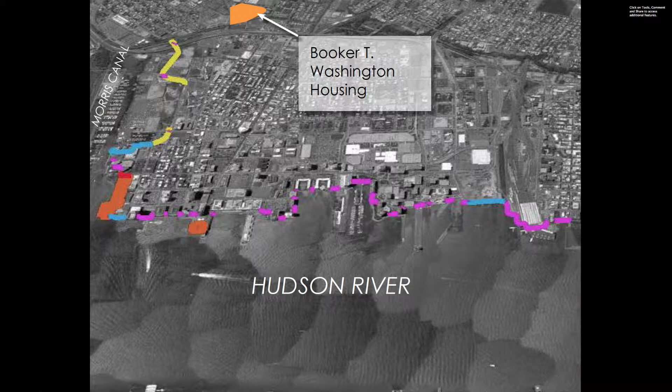Washington housing site. What that meant is that during Superstorm Sandy, parts of the site experienced 5 to 6 feet of floodwaters. Basically, there were rescue boats going around the streets of Booker T. Washington during that event. The dots are actually part of a year-long study we did with Stevens Institute of Technology, looking at water flows in the area and doing a resiliency plan. Next.

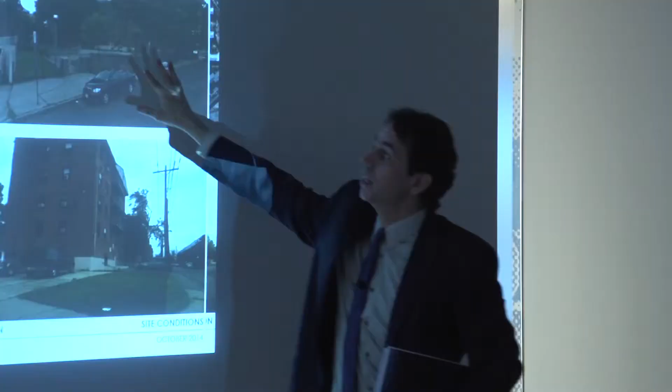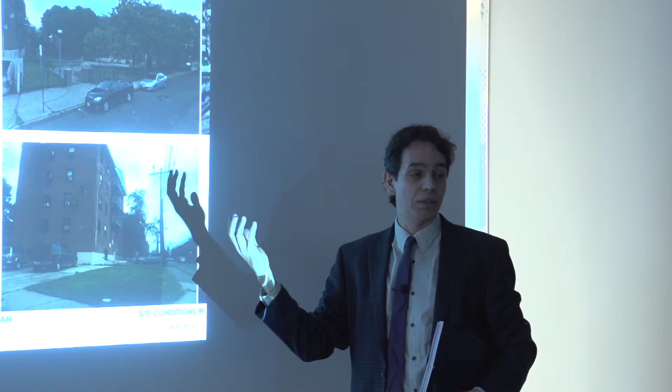But you can see this is lower scale campus style housing. There are actually wonderful mature trees on the site. We did a great walking tour with the residents who really told us a lot of anecdotes that reinforced our digital analysis of the site. Putting those two things together was absolutely critical. The residents were fabulous. Next.

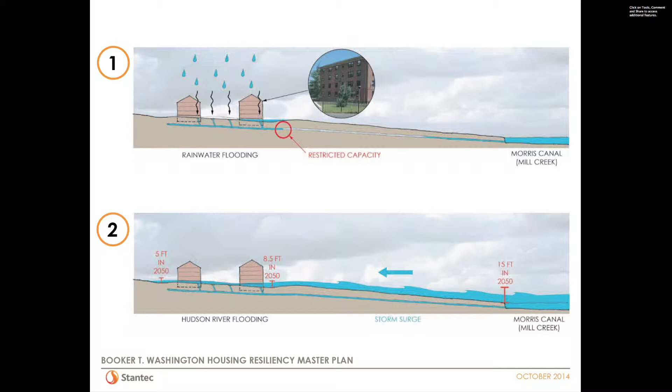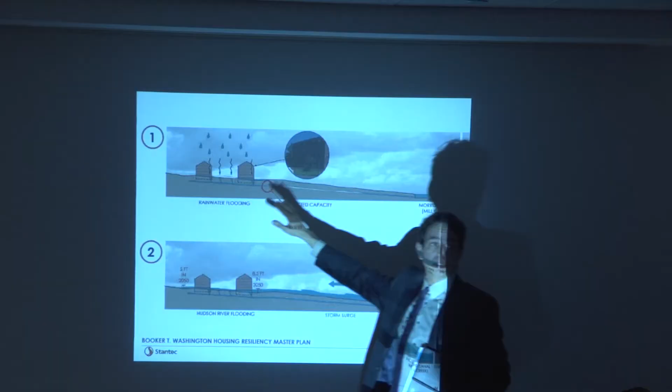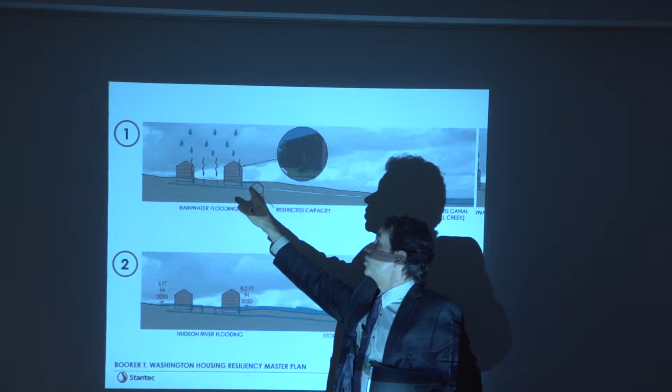And what we learned is that there's really two types of flood events on this site. So if you're looking at a side view of the public housing site, the first event that you get is a heavy rain event. All of the rain that lands on this property basically is collected into a series of pipes. The well-known combined sewer system doesn't have sufficient capacity for these major heavy rain events. So you get localized flooding on the site, and then so much pressure that the water is actually backing up into the first floor plumbing. So we have that as one set of issues.

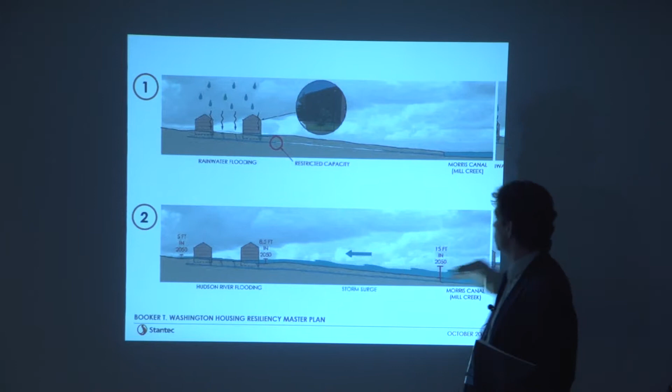The second set of issues is flooding that comes from the side, when the Morris Canal and the Hudson River overflow their banks, as in Sandy, and you get a rush of water coming in from the side. What we did was analysis of future sea level rise. While we had maybe 5 to 6 feet of flooding on the lowest end of the site during Sandy, we anticipate that's going to increase to about 8.5 feet of floodwaters on the lowest end and maybe 5 feet on the higher end.

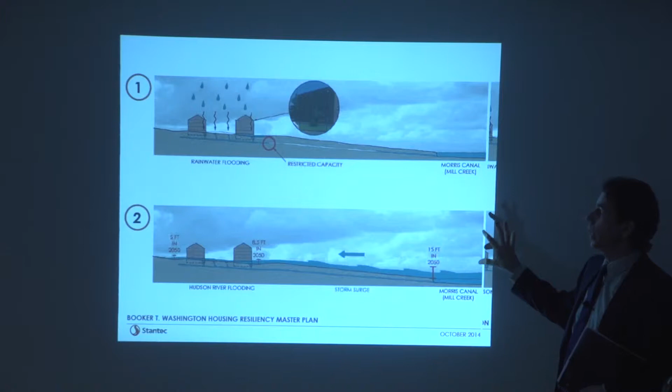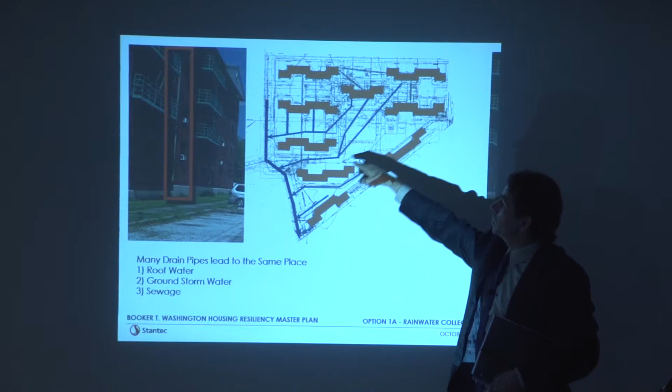So I want to really go through strategies to deal with those two types of flooding events separately. So go to the next. So let's deal with the heavy rain events first. Next. Here you can see a plan of the project and a map of the underground piping connections. The buildings are in orange. These blue lines are basically all of the stormwater and sewer connections.

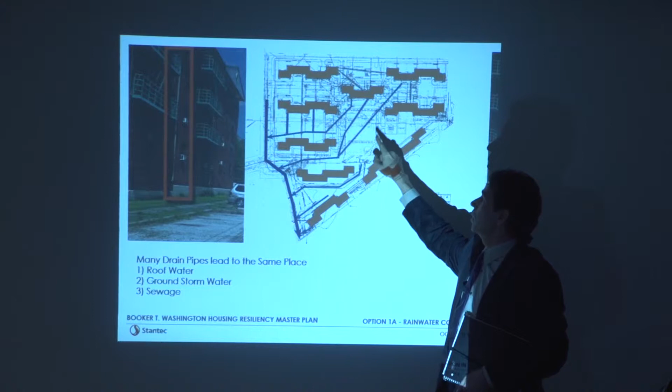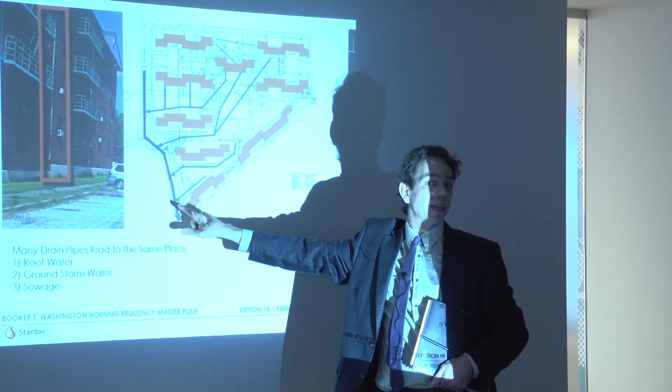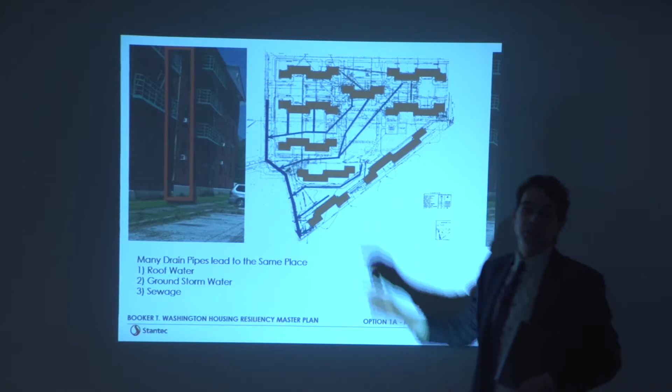All of the roofs, all of the groundwater, including in the grass, on the paving, and the sewer, all go into these pipes, and they all go into one pipe. And this pipe isn't big enough to handle that capacity. That's why you get flooding from rain events. You can see from the roof, you get pipe leaders. They actually go back inside the building and then connect to these pipes underground. So there's just too much water going to too small a place. Next.

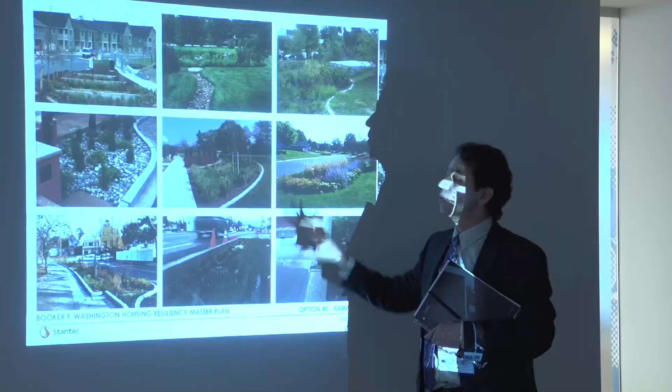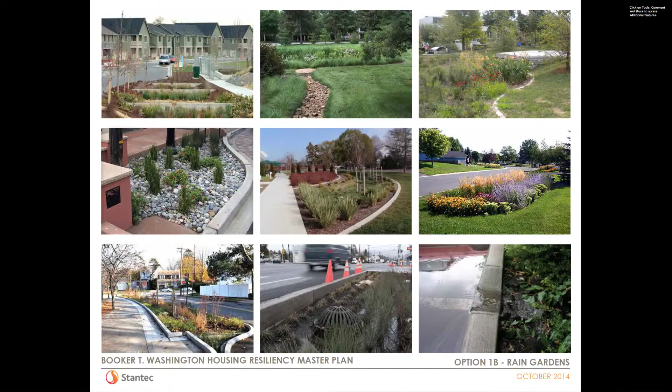But there's ways you can deal with that. You can divert that water away from the piping system, and you can use natural methods to do that. So these are rain gardens, various types that capture rainwater, and if you put the right types of plants in them, they can clean the contaminants in the rainwater, filter it, and gradually let it filter into the ground. And therefore you're directing it away from the piping system. We've worked on these types of projects all over the country. Next.

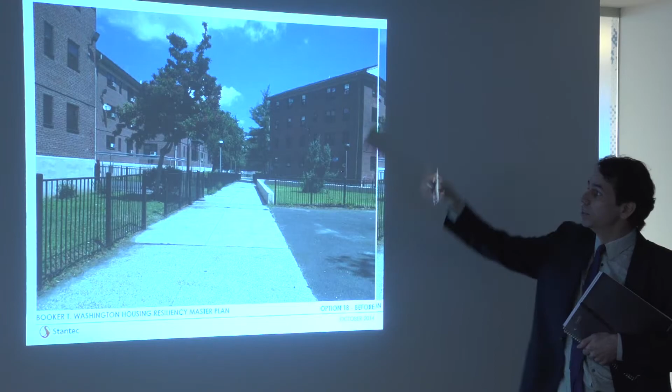So this is what we could do. This is a very early sketch. As we said, we're only about 30% through the project. We could create rain gardens around the edges of the buildings, capture the water that comes down from the storm leaders, and it would be filtered and cleaned by these rain gardens and diverted away from the underground piping system.

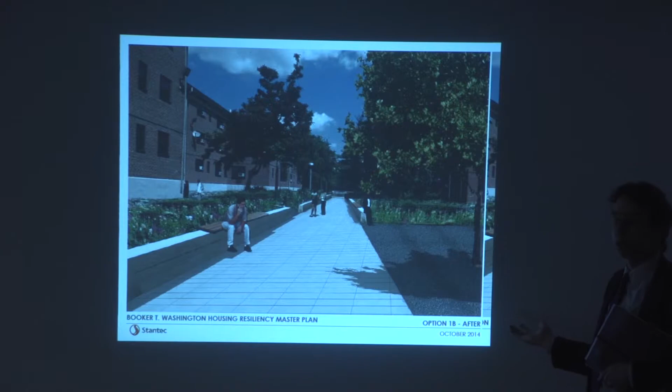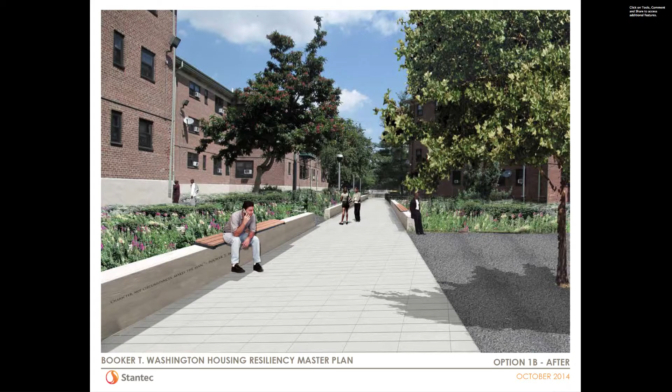And these actually are elevated because there's a high water table, and that's probably true of many public housing sites. So the water can't filter in very quickly. By raising the ground, it gives us additional capacity. And we can work various public amenities into that plan as well.

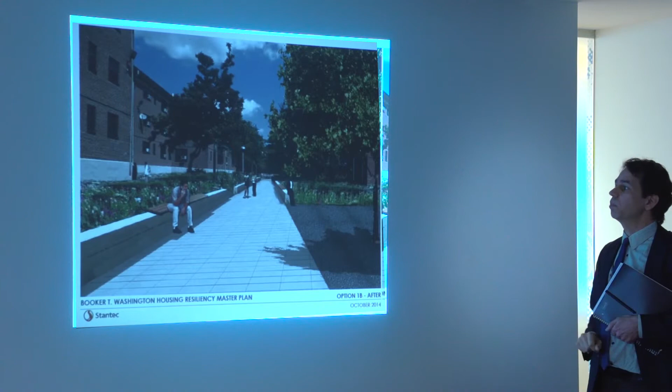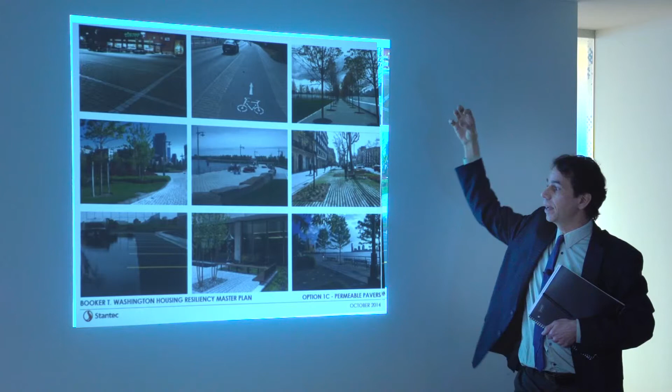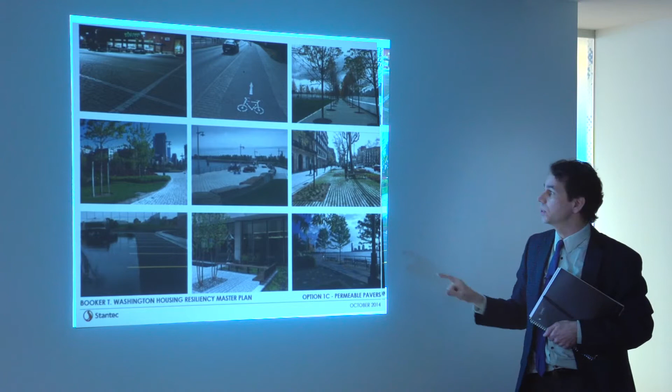Now, other things we can do is replace the paving that's right now impermeable with pervious paving systems that allow the water to seep through the paved areas. There's various types of that that we can install, and our landscape architects have worked on this in many parts of the city as well as the country. Next.

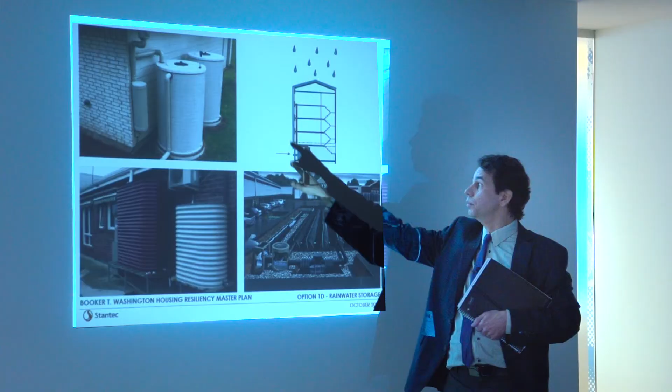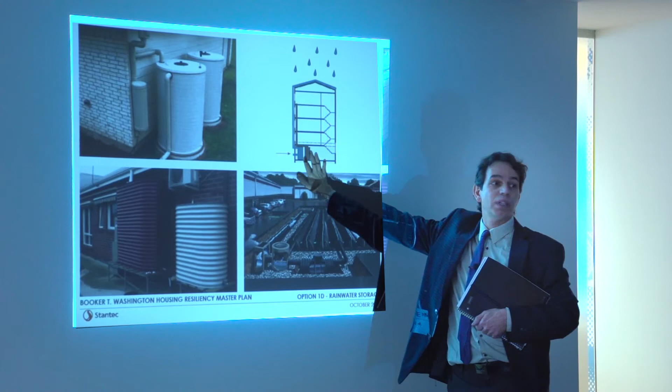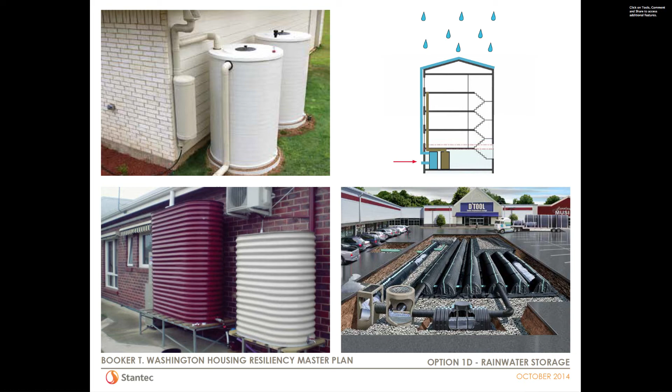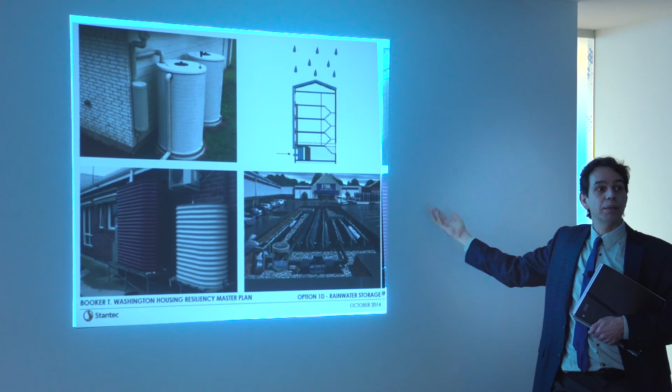So by storing the rainwater during a heavy rain event, we can keep the sewage from overflowing out of the underground pipes and into the Hudson River. And then we can release that water after the heavy rain event is over.